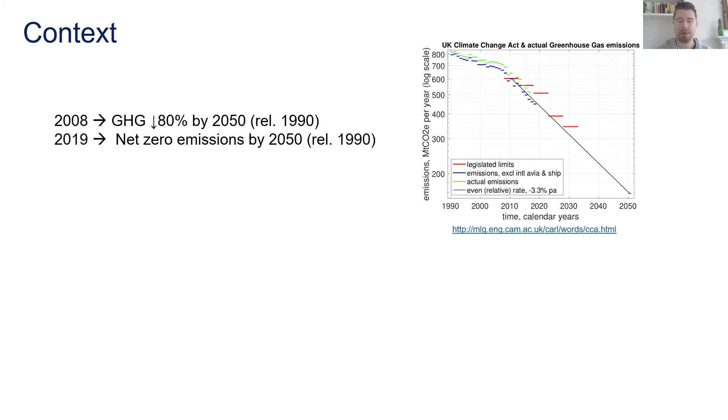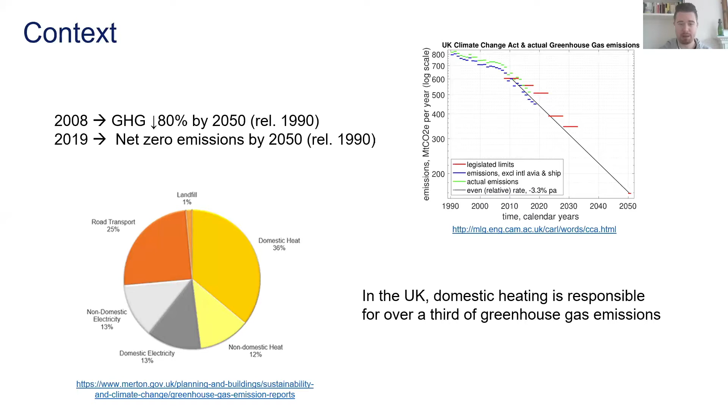You can see that pathway drawn out there, minus 3.3% per year that we have to get down to by 2050. So there's good progress that's been made, and a lot of time has been looked at electricity and transport. But what I want to point out is that actually in the UK, heating, and in particular domestic heating, is responsible for over a third of our greenhouse gas emissions. So if we're going to make changes to get to net zero emissions by 2050, we really need to be thinking about heating as well as electricity and transport.

So just a little bit more context. As I'm sure most of you are aware, unless you live in Northern Ireland, most places in the UK primarily run their domestic heating, cooking, etc. on natural gas. It's changing in Northern Ireland - I think there's quite a lot of oil still at the moment. But from the government's own reports, it says that the predominant source of heating for the vast majority of customers connected to the grid is natural gas. There's some biomethane, but not in large quantities.

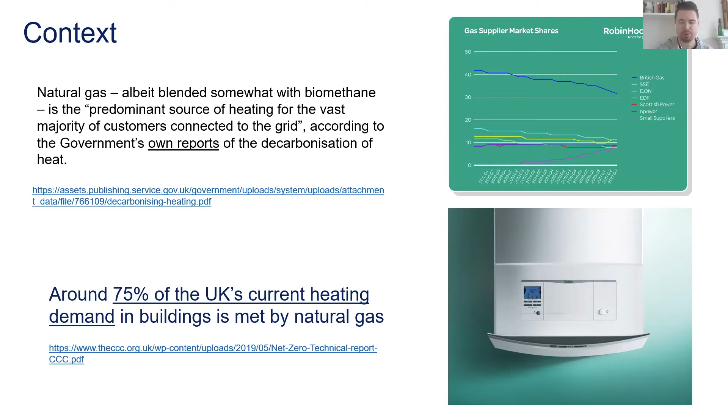So if we want to move forward, what can we do? What are the potential solutions? How could we be heating our homes in a more carbon neutral or a more green way? One way you could think about it is, like we have with transport, we could think about electric heating. I mean, it's not really thought of engineering-wise as the best solution for heating.

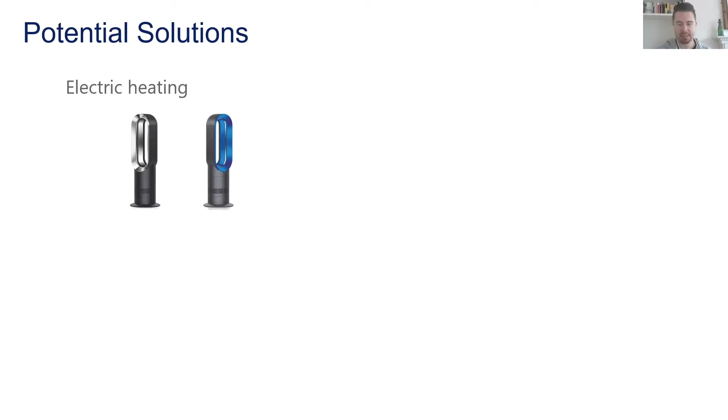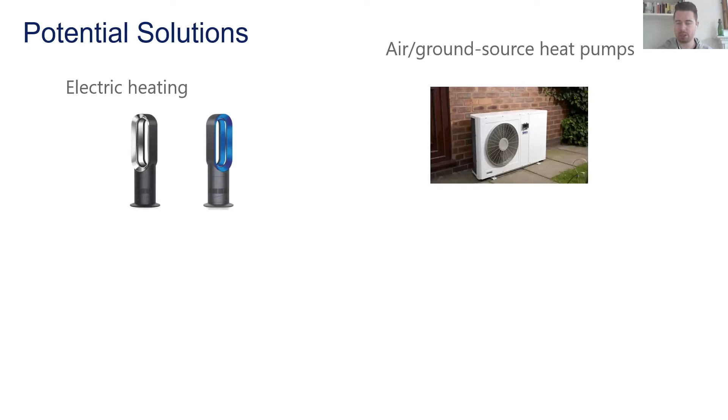It's a great way of powering devices, of doing lighting, but when it comes to heating and cooling, it has its issues in terms of efficiencies. There's a lot of great work out there looking at air and ground source heat pumps. These have been around for a long time, but they're becoming more efficient. But it really does depend on capital costs and the ability to install these in the buildings in question, but there's certainly work to be done there.

Another area which I'll touch on is the increase in the use of biomethane. So rather than using natural gas deposits, why don't we get our methane from a biomass source, in which case you've taken in the CO2 in the growth of that biomass. It's not zero carbon on net, but it is a massive reduction.

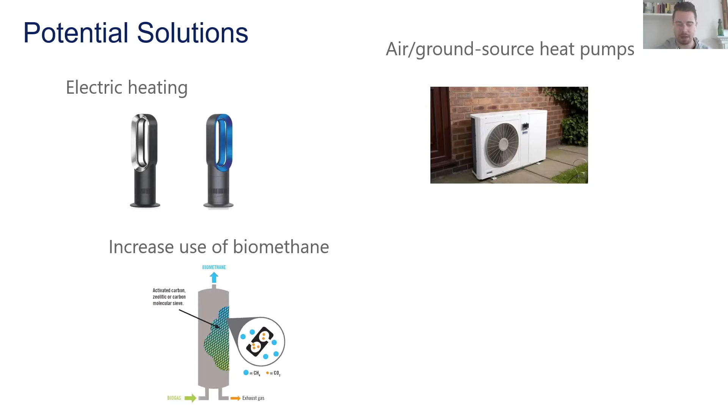And then the one I want to actually focus on today is reintroducing hydrogen. Now, I want to give you a bit of context. Why do I say reintroduce hydrogen? Well, a bit of history.

Actually, although we're all probably used to natural gas, it wasn't always around in the UK as our fuel of use, for example, street lighting or even domestic lighting. In fact, the use of hydrogen as an energy source goes back to the end of the 18th century. An engineer, William Murdoch, lit his house and office in Cornwall using something called town gas. So over the 19th century, gasworks and gas distribution pipelines were built across the UK to ship town gas all the way around the country.

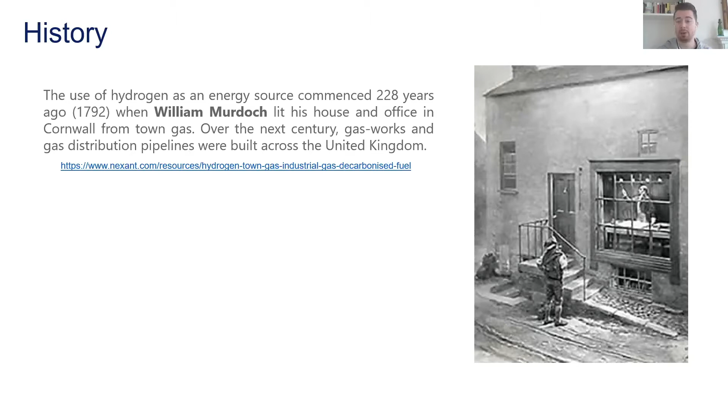So up until the 1960s, this town gas, also known as coal gas, comes from coal, contained about 50% hydrogen, about 35% methane, about 10% carbon monoxide, and about 5% ethylene or ethene. And that was common as the gas for fuel and lighting.

So it's made from heating coal in the absence of oxygen, but it was replaced by natural gas only really during the 20th century. And a lot of this was to do with the 1960s, us discovering these indigenous natural gas fields, and a few other reasons. But essentially, we did for over a century use gas for heating and as a fuel generally, that contained large quantities of hydrogen. So that's why I talk about the reintroduction of hydrogen.

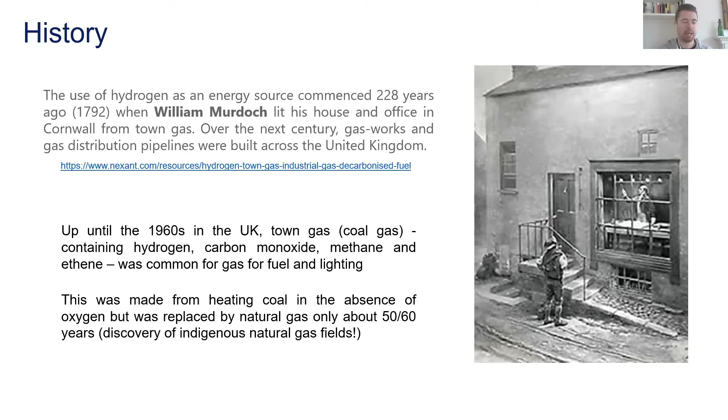So how would we go about this? What do we need to think about if we were to move towards a hydrogen-based heating network? So firstly, what needs to change?

One thing I need to point out is that there is existing UK legislation that prevents hydrogen accounting for more than 0.1% of national grid mix at any time. So this is not a limit on how much you put in because you want to use it, but how much is in there almost as an impurity.

So there's definitely room for policy change, and a lot of work needs to be done to figure out what is the sensible amount of hydrogen to put in from a safety perspective, from an economic perspective, from a technological perspective. But fortunately, even though this legislation exists, there are trials, which I'll get onto in a moment, that have been able to bypass these rules just in the short term.

The other thing we need to think about is infrastructure. Importantly, one of the big reasons why people are pushing hydrogen as opposed to, let's say, electrification or a different solution to our heating problem, is that the idea is to leverage the current UK gas network. So we don't have to completely change the infrastructure, but what we do need to do is make it fit for purpose.

So we do need to introduce this green gas, whether that's biomethane or hydrogen, and ensure that it's safely developed and maintained using the correct piping, which I can maybe go into a little bit of detail about, but it's not my forte. But it's certainly important to think about whether it's the transmission or the distribution or the pipelines right next to your house, what exactly they're made from.

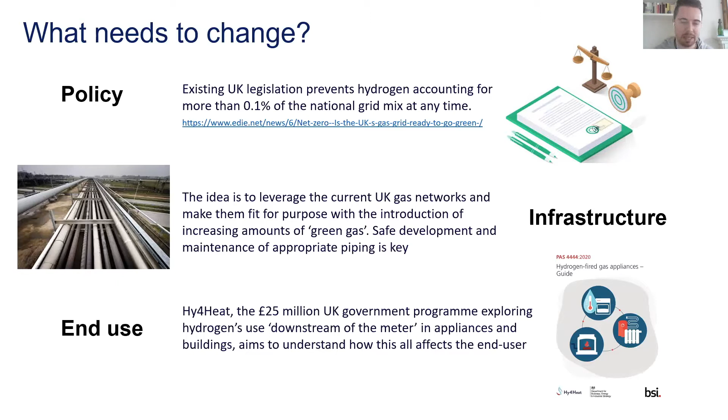Hy4Heat is a £25 million UK government program that's looking at how hydrogen is used, not in the transmission and distribution pipelines, but more by the end user downstream of the meter - so looking at appliances and buildings and seeing how it affects us all.

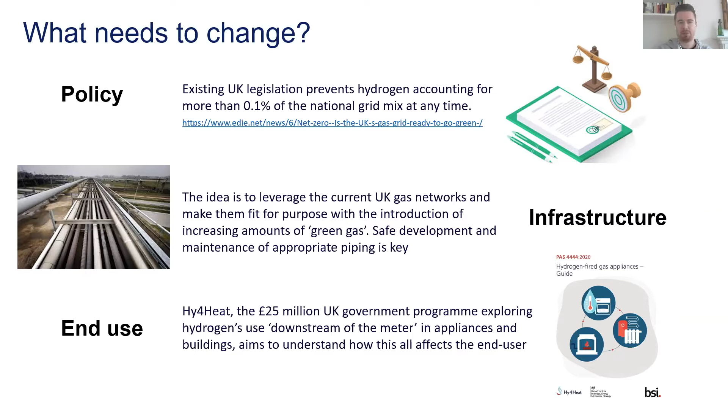So I would say broadly, those are the three areas that really need to change. What I'd like to do is just highlight some projects in this field, because in 15 minutes it's probably quite hard to get through everything, but this might be something if people are interested in, they can look into it more.

So one of the first big moves forward in this area was about 4 years ago. There was a project called H21, an ongoing project, but in 2016 there was a report that came out that focused on Leeds City, and it was led by Northern Gas Networks, but other gas networks around the UK were also involved. The important take home is that it proved that you can convert the existing gas grid, in this case, to carry 100% hydrogen, although this is not necessarily the way that all gas networks will go.

And they proved that it was technically possible and that it was cost effective. And so a lot of work has come out of that, and a lot of the projects I'll show you have really used this as a stepping stone, a springboard to a lot of the policy and further safety tests that are going to be carried out.

So H21 proved that for a specific network, and then they are concentrating now on two pieces of work. One of them is doing quite a sophisticated safety assessment - I can show you a video maybe at the end, or point you in the direction of it, where they build houses and gas distribution networks and all sorts of different aspects along the pipeline to test the safety and show that it can be as safe as our natural gas network today.

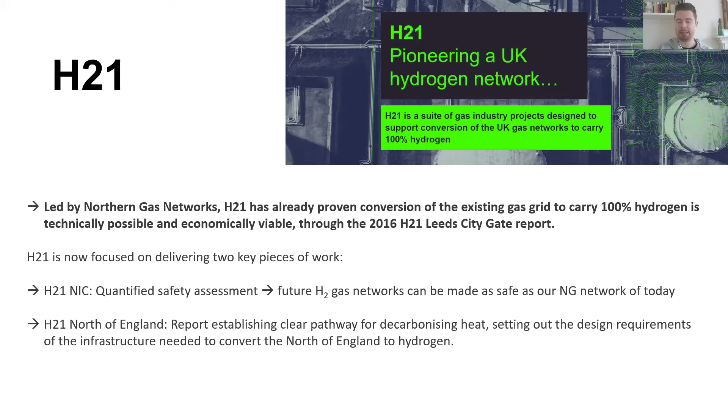So that was kind of the underpinning work, but there's some more specific work behind this. Another general policy move was by the Energy Networks Association - this is something called Gas Goes Green, and it convened different networks. So Cadent is another gas network, along with Northern Gas Networks and the National Grid, to work on this project.

And actually, during this work, they highlighted that both hydrogen and biomethane are required to accelerate progress. So it's one of those examples of getting a big consortium together and figuring out how we can get to net zero carbon, and it's highlighted that hydrogen and biomethane are really important to get there.

As a result of this and H21, there's a lot of work looking at how we can move towards that - so we need to start now preparing for the transition. Doing a lot of the initial work on safety and policy, connecting the different people and players involved, as well as the gas networks themselves, and then introducing, whether it's anaerobic digestion for biomethane or new hydrogen production facilities, and then expanding the demand base.

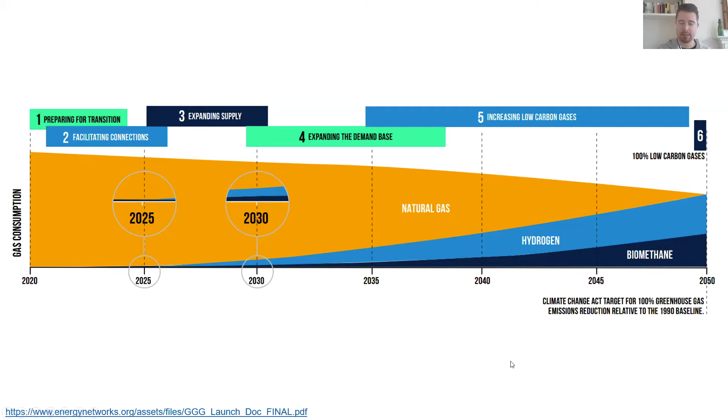And at the same time, you'll see also generally improving energy efficiency, so reducing our overall gas consumption and replacing natural gas bit by bit with hydrogen and biomethane. So this is the Gas Goes Green plan that you can find out much more detail about at the link below. But some other projects highlight what's been happening very recently in this area.

The idea is to inject hydrogen into their existing natural gas network, much like the H21 project in Leeds. Here the gas network supplies 30 faculty buildings and 100 domestic properties, so this is actually the first ever live demonstration of hydrogen going into homes.

As I alluded to before, it's not always about putting 100% in. Here, it's blending up to 20% by volume of hydrogen into the natural gas grid, showing that it is a safer and green alternative to gas that we use now. Researchers say that if we scale this up, we could mitigate the annual emission of about 6 million tons of CO2 equivalent emissions.

So it's a huge project that has got underway. With all the coronavirus issues going on now, it's somewhat been halted, but I think it gives an example of where we are, that there are live projects inputting small or appreciable amounts of hydrogen into these networks, and progress is definitely being made.

Another example of a project, this is from the Cadent website. This is HyNet, in the Liverpool, Manchester area, but also working with industry. It actually involves a larger scale project, heating 2 million homes in the area.

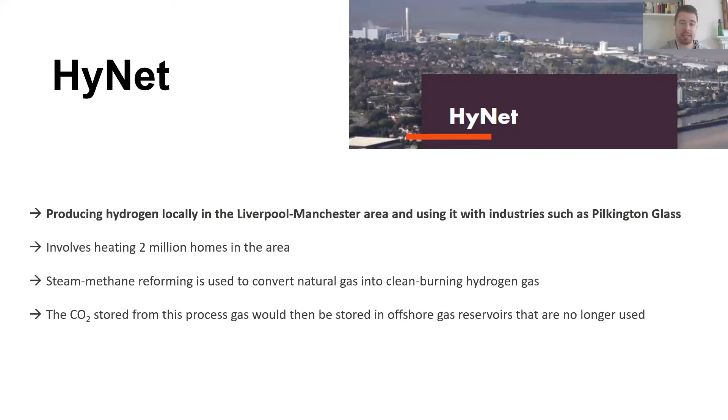So in the HyNet project, the idea is to produce your hydrogen through steam methane reforming, but combine that with carbon capture, utilization, and storage. You convert your natural gas to clean burning hydrogen, and the CO2 you capture is then stored offshore in gas reservoirs. So here's another example of a recent project pushing very fast in the direction of decarbonizing our gas network.

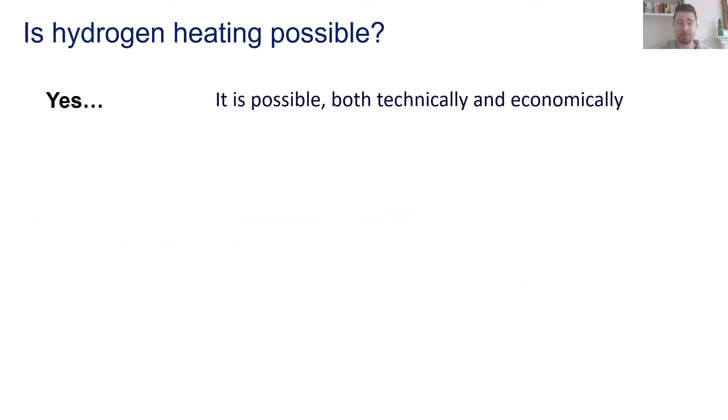So to summarize, is hydrogen heating possible? I hope I've shown you that yes, we have good evidence that it is possible, both technically and economically. But it does require rigorous safety testing and some infrastructure upgrades. Nevertheless, a lot of this work is already underway.

There's funding being provided—another bit of funding has come to the H21 project, about £7 million very recently, on top of that £25 million for the Hy4Heat project. And there's a huge consortium; this isn't a project run by just one provider, think tank, or company. It's actually developing the idea on many fronts, from the technical, the economic, the safety, and even the public perception.

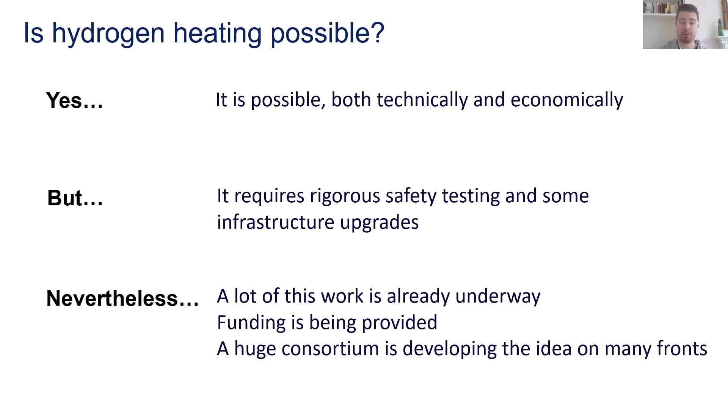So that's the end of my talk. I'm happy to take questions, I'll answer them as best I can. But if you want to, I'd really recommend watching the 10-minute video on the H21 website, which talks about the safety elements they are looking at. Thank you very much for listening.

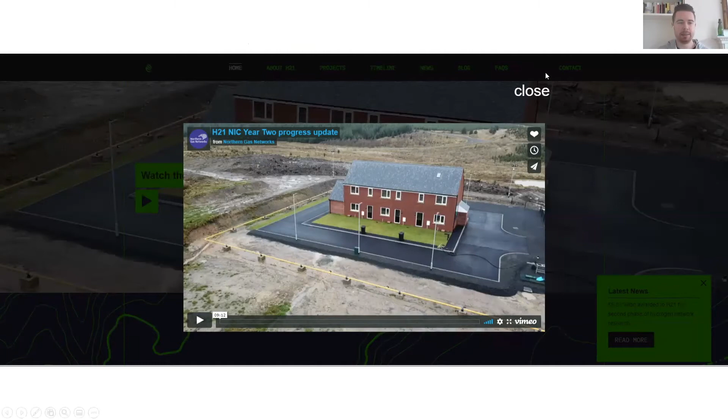Fantastic, thank you very much, Josh. That's a really interesting insight into all the different flavors of hydrogen heating and a good overview of whether it is possible, and it seems like it is, so thank you. We have time for some questions, and we've got some participants in the room, so if anybody would like to raise a hand and ask a question, otherwise I will ask one. Yes, Claire.

Hi, I've got a question. Not quite old enough to remember town gas, but I know in the 1960s when they converted from town gas to natural gas, it basically involved end users changing or adjusting their equipment because there's a difference in the amount of oxygen needed to burn the two fuels. I'm assuming the same would be true of hydrogen. The stoichiometrics are very different for burning methane versus hydrogen, so the volume of oxygen required to burn it efficiently and safely is going to be different. So would that present a big issue?

Because unlike the 1960s, when most people heated using coal or oil, everybody's also got central heating now. And if everybody needed to convert their central heating boiler as well as their cooker in order to burn hydrogen, wouldn't that present a bit of an issue? Because you can't just do that overnight.